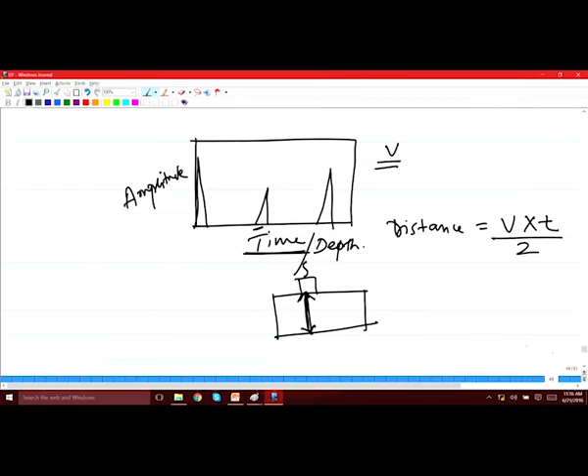In order to do that, you need to use a different type of block. This block is quite versatile, in the sense it can not only do calibration for the angle, but it can also calibrate normal probes as well, and there are a few more things you can do using this particular block, as we are going to discuss today.

This block is known as the IIW block. IIW stands for International Institute of Welding. So this block is specified by this institute.

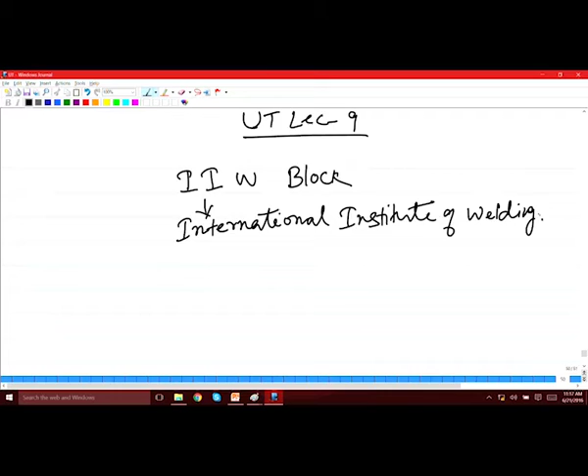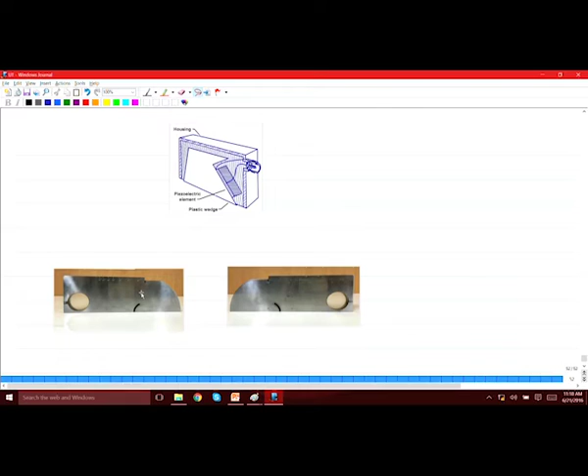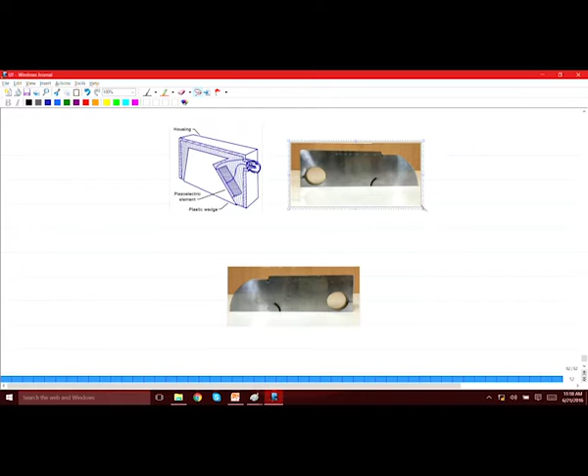If you see the block, it looks something like this. Let us say you have this kind of angle probe, which you have seen before, and you need to calibrate it for the angle and a few more things, as we are going to see. For that, this is the IIW block which is used. Let me magnify it a bit so that you can see it clearly. So this is how it looks like.

It is a block made of steel, and there are a few features on this block, and with the help of these features we can calibrate an ultrasonic transducer and the instrument.

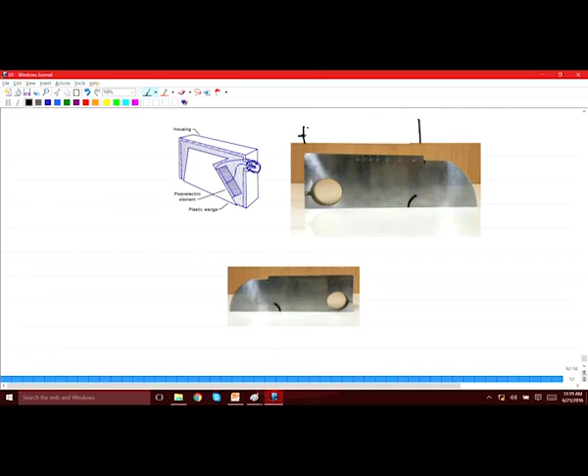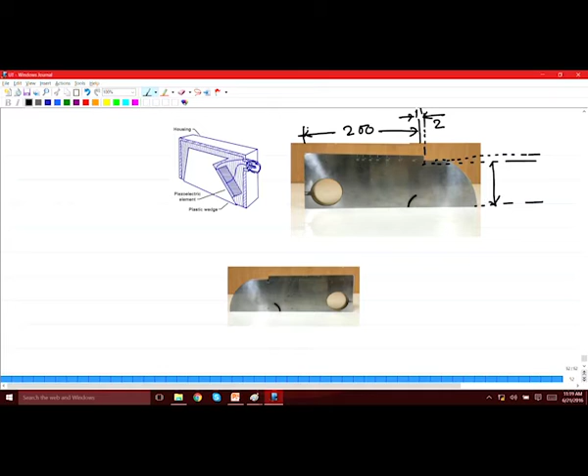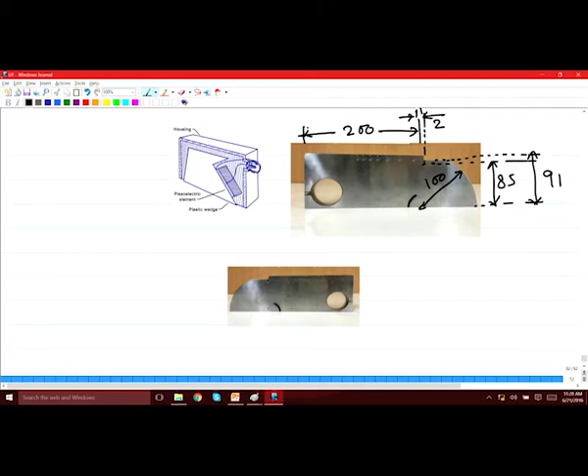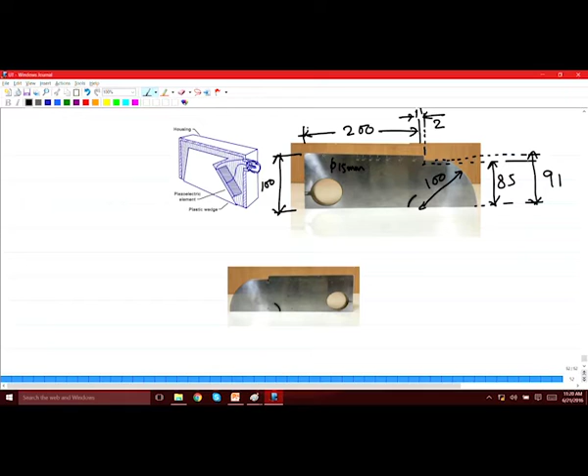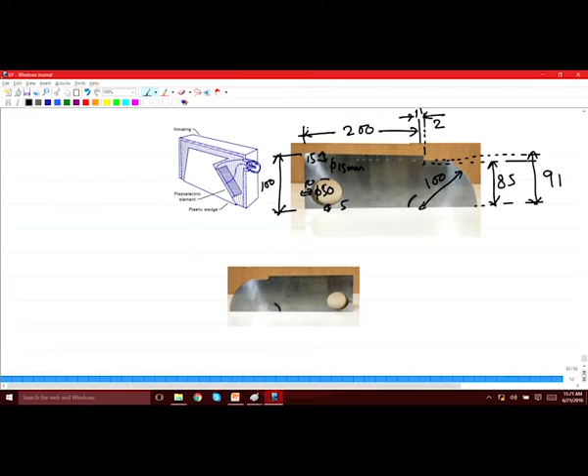There is a hole over here at this location. It is a small hole, the diameter of which is 1.5 millimeter, and it is at a distance of 15 mm from the top. And you have a bigger hole over here, which is 50 mm in diameter; from this end it is 5 mm and from the other side it is 10 mm. The total length of this whole thing is around 300 mm.

So these are the typical dimensions of this particular block, and now you can see there are several features on this. The first one is a curvature over here, this 100 mm radius curvature. Then, as I said, there are two holes: one over here which is 1.5 millimeter, and then a bigger one, a through hole, which is 50 mm in diameter.

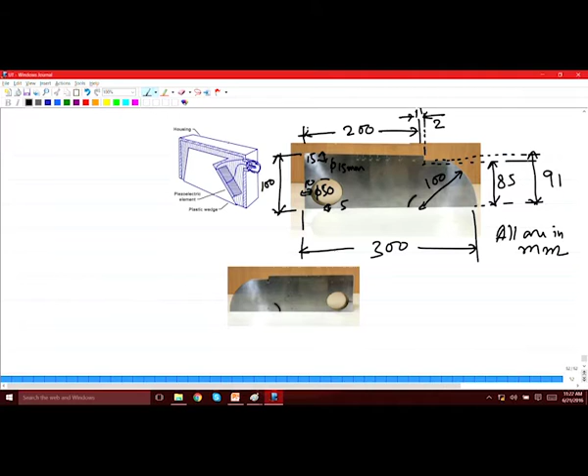Let us see how this can be used to calibrate angle probes. This is an angle probe shown over here, which you have seen before also, and you've seen this plastic wedge has been cut over here to provide that particular angle that you need.

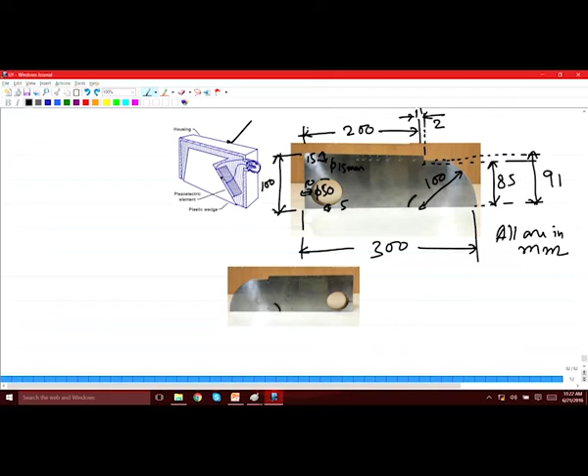The first thing that you need to know for this kind of angle probe is from this surface, exactly where the beam is exiting. So which exactly is the beam exit point? Because the angle has to be calculated with respect to that particular point. There is a surface here and you do not really know exactly what the exit point is, so the first thing you need to do is find out that exit point.

Only then can you talk about the angle, because the angle is measured with respect to the index point. So the beam exit point is also known as the index point, and that is the first thing you need to find out.

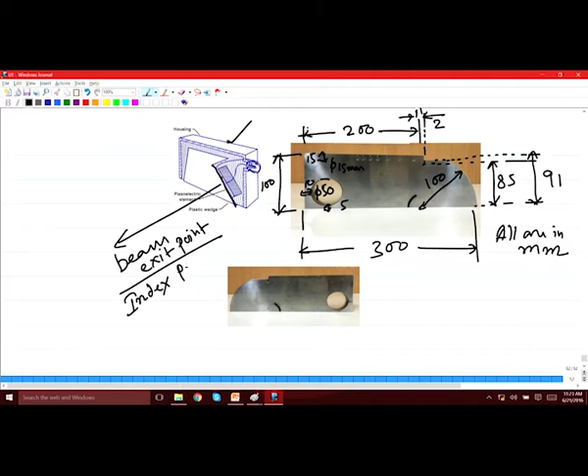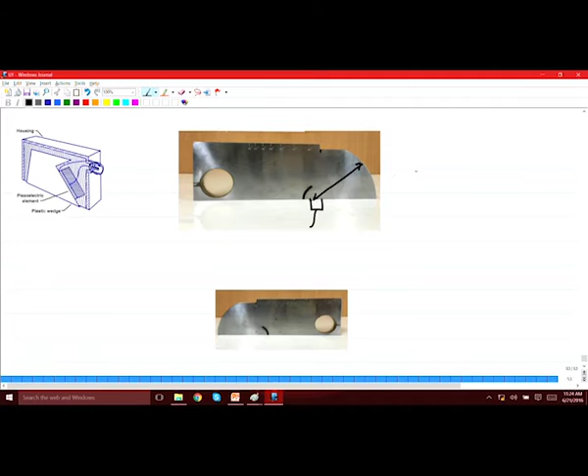Okay, so in order to find the index point, you have to keep the probe on this surface somewhere here, and hit this curvature and get an echo from there. So this echo from this curvature will be maximum when the probe is exactly on the center of this curvature.

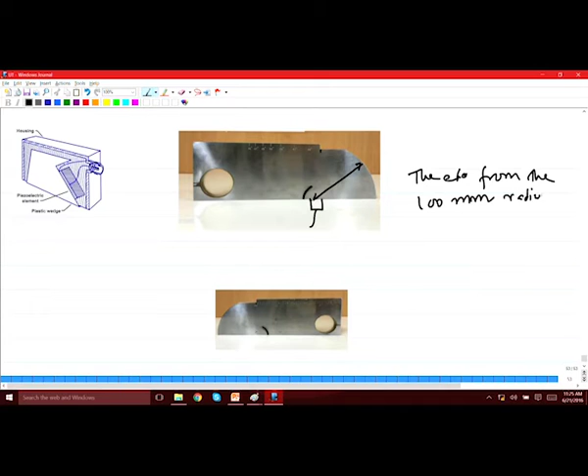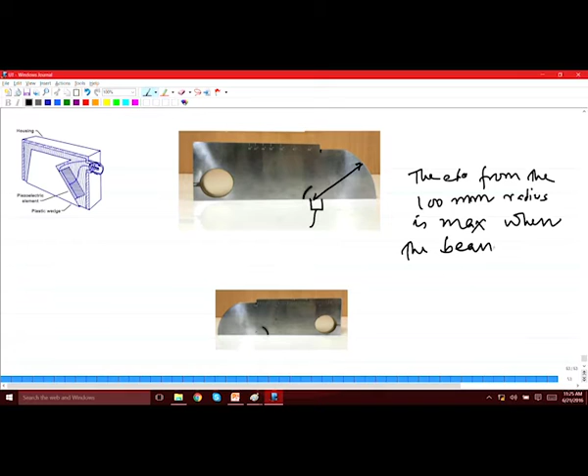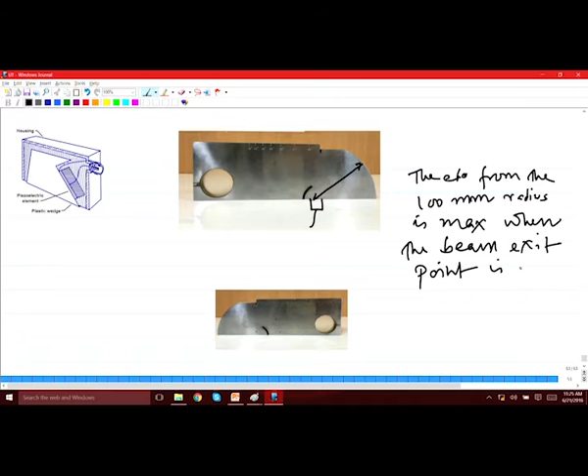So when the beam exit point is at the center of this curvature, you get a maximum signal. So what do you do? You take this probe and then move it on either side like this till you get a maximum signal. So the moment you get the maximum signal, you stop there and mark that point.

So there could be a marking on the block also, which is the center of this 100 mm radius. So that you mark on the probe as the index point or the beam exit point, right. So in some of the probes you can already see that this index point is being marked right on the probe. If that is there, that will be your index point, and you can match it by this particular method. And if it is not there, then you should mark it like how I said, getting a maximum signal from the 100 radius, and then at that particular point you mark the index point on the transducer probe.

So that is the first thing you do, and then you go on to calibrate the angle and other things. So let us see how you calibrate the angle using this particular probe.

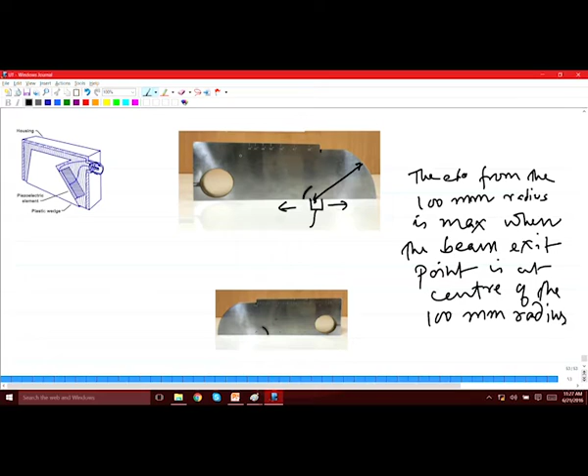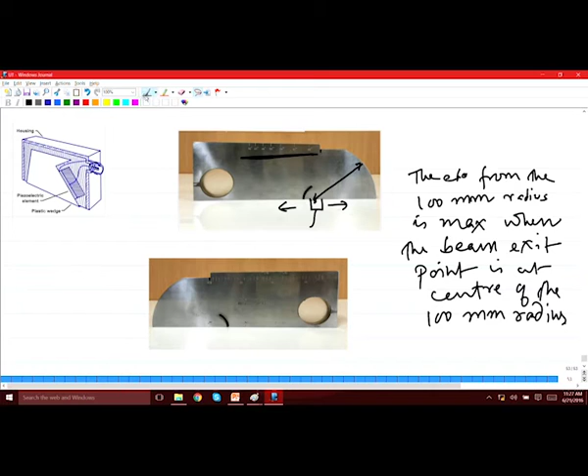So in order to calibrate the angle, if you look here on this part, there is a scale graduated on this, on the block. That is the scale for the angles. We can see there are several angles which are marked there, like 45 degree and 60 degree and so on. Similarly, on the other side also, on the bottom also you could see, here also along this area, there are some angles which are graduated, which are marked on this surface.

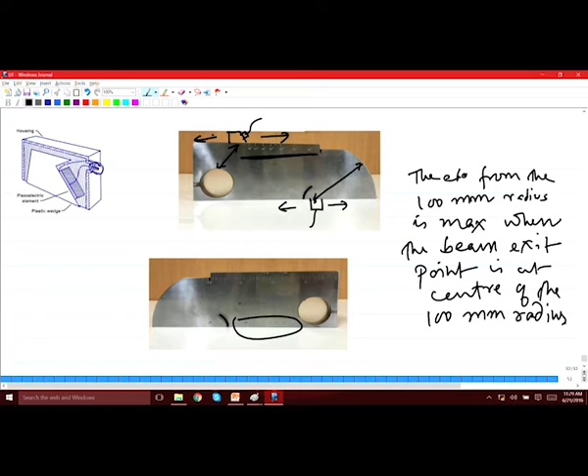So using these angle scales, you would be able to see what exactly is the angle of the ultrasonic beam which is coming out from an angle probe. So in order to do that, what you can do, you can keep the probe over here on this place, and then get an echo from this 50 diameter hole. So what you do, you move this probe on either side like this again, so let us find out the beam angle from this.

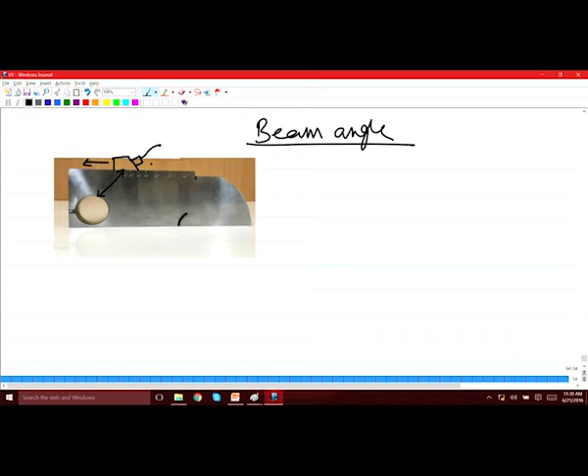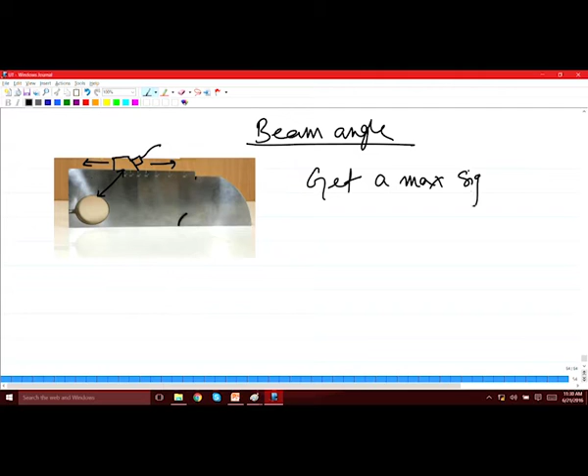So, as I said, you keep the probe on this surface, and get an echo from this 50 diameter hole. And what you do, you move the probe on either side like this and get a maximum signal from the 50 diameter hole.

So when you get the maximum signal, you stop it at that point and then see from this scale that the index point of this probe is matching with what angle. That will be the beam angle. So this is how you find out the beam angle first.

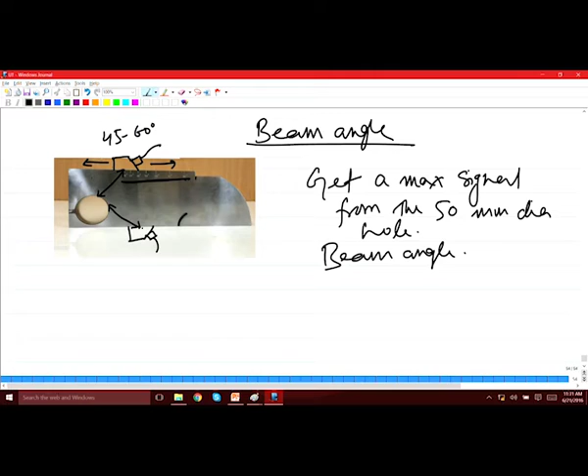So this top surface that you have, if you keep it over here, this can be used for angles in the range of 45 to 60 degree, and for higher angles you could keep the probe over here on this surface. So this will be 60 to 70 degree, because if you have seen the angles, the higher angles are on the lower side and on the top side this is the range. So this is how you first get to know the angle.

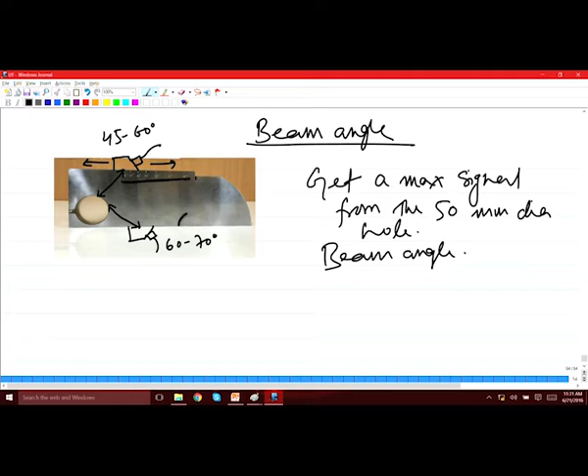Once you have established the index point, you get the beam angle. But a beam angle will also have a spread, beam spread. So this spread also you need to find out as to how much is the spread in the angle. So what you do, once you establish this angle and the corresponding point for the maximum signal, you move this probe again on both the sides from that point of maximum signal.

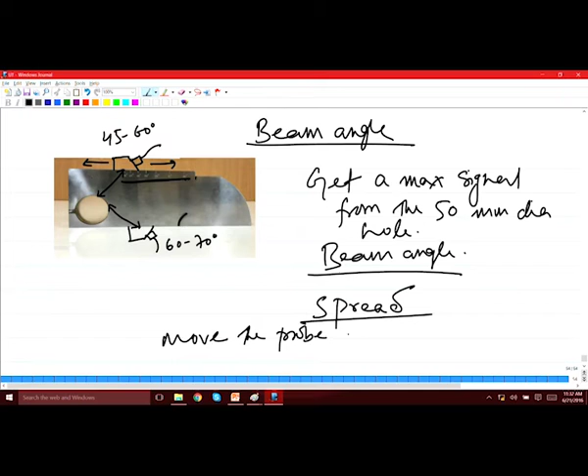So first you move, for example, towards the left till the signal becomes 0. So move it on either side till the echo becomes 0. So first you move it on the left hand side and then see at what point it is becoming 0. Note down the angle when it is 0, and the difference of these two angles on either side will give you the beam spread.

First move to the left and see at what point the signal becomes zero, note down that angle, then go to the other side till it again becomes zero. Note that angle also, take the difference of these two angles, and that will give you the beam spread. So, this is how you find the beam angle and the beam spread using this IIW block.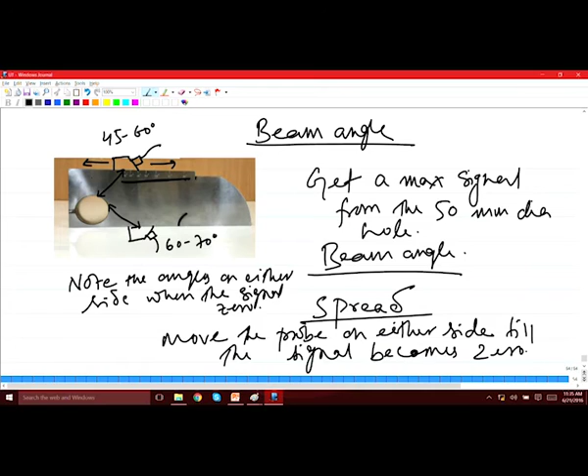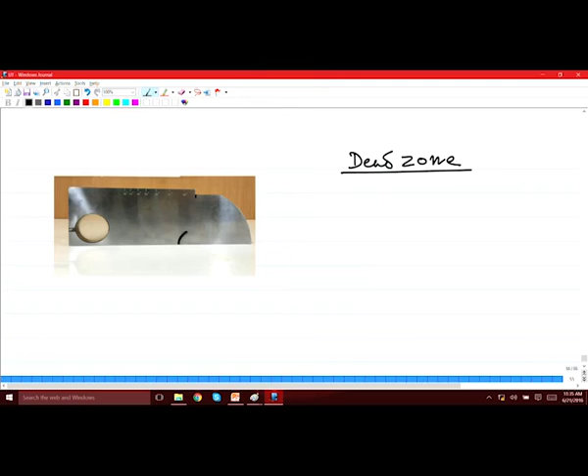There are a few other things, as I mentioned in the beginning, that you can do using this block apart from finding the beam angle. Let us see what other useful things we can do with this particular block. One very important aspect, as we have discussed before, particularly for closed surface analysis by ultrasonic testing, is the dead zone. You should have some idea about the dead zone for a particular transducer used for closed surface analysis.

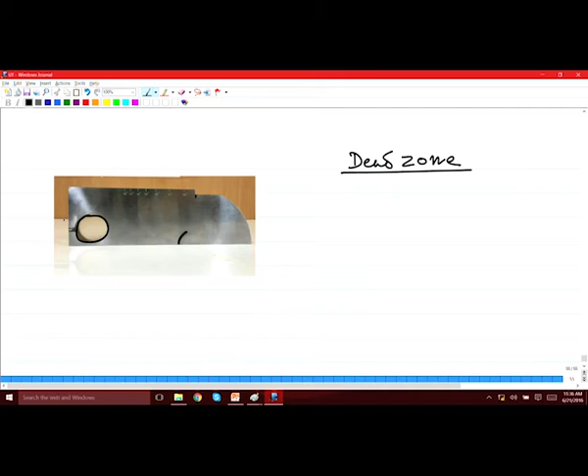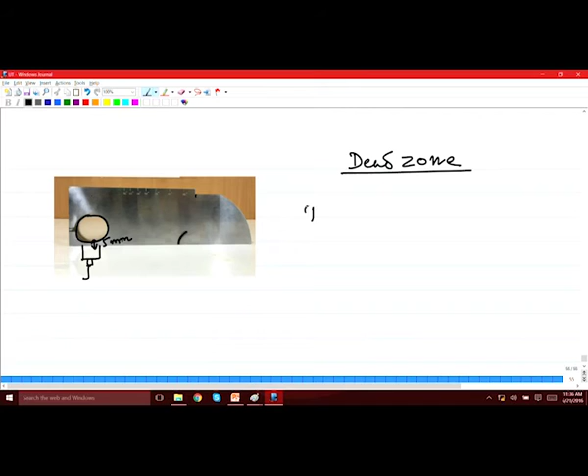That can also be found from this block, using this 50 mm diameter hole. What you do is keep the probe at this point first, and you know this particular distance is 5 mm. From this location, if you get a clear signal from the 50 mm diameter hole, then it will indicate that the dead zone is within 5 mm or less.

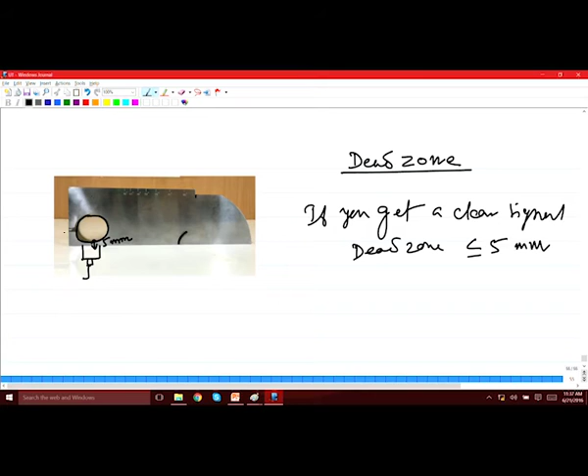Because you are getting a signal from a 5 mm distance using that probe, it indicates the dead zone is less than 5 mm. If you do not get a clear signal from this side, then you put the probe at another point where the distance is 10 mm. If you get a signal from the 10 mm distance, but not from 5 mm, that indicates the dead zone is between 5 mm and 10 mm. On the other hand, if you do not get any signal from the 10 mm distance either, then it indicates the dead zone is more than 10 mm. This is how you can get an idea about the dead zone from this IIW block.

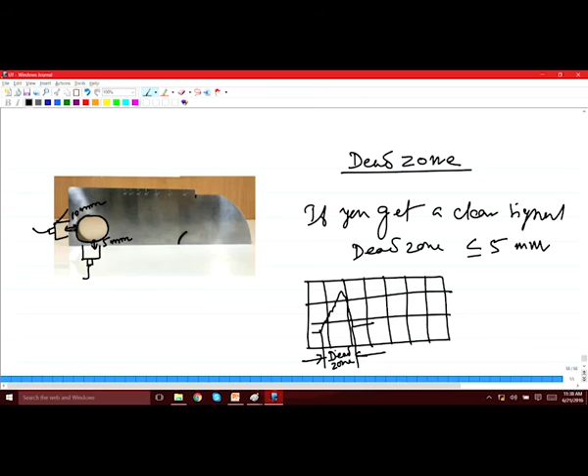I should also tell you that some idea about the dead zone can be obtained from the display as well, from the initial pulse that you have. Let's say the initial pulse might look like this. The width of this initial pulse will give you an idea of the extent of the dead zone for that particular probe, using which you have obtained this initial pulse.

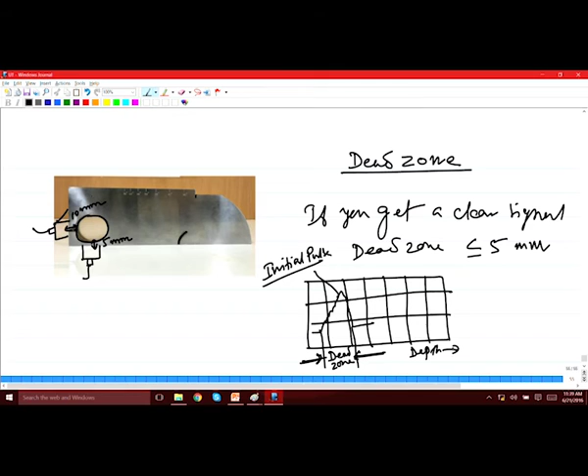Because within this particular distance you do not see anything apart from the initial pulse, you do not see any other echo. That means within this distance the probe is not able to receive any echo at all, and that is why the width of this initial pulse indicates the size of the dead zone for that particular probe.

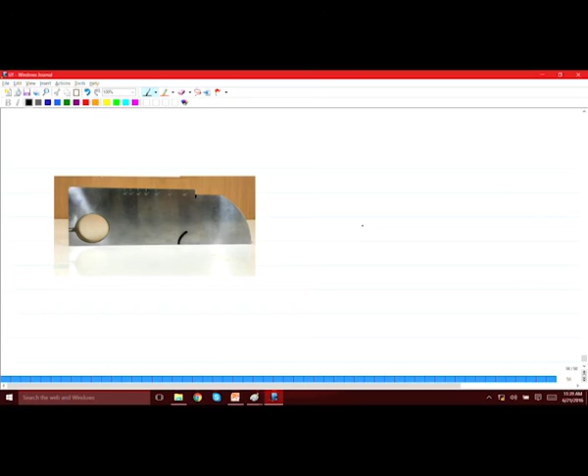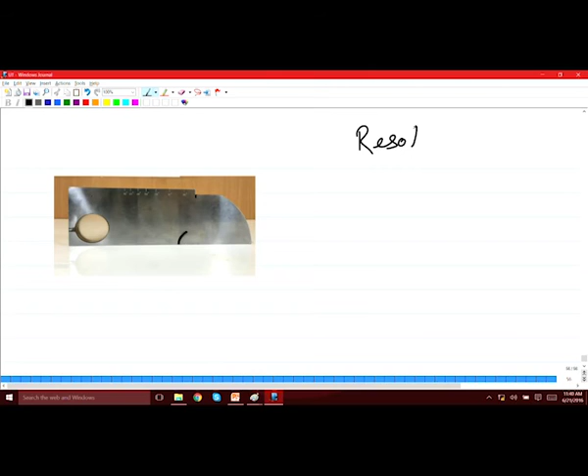We will see one more important thing which can be found using this IIW block, which is the resolution of an ultrasonic probe. Resolution means if you have two closely spaced defects lying very close to each other, you should be able to get two different echoes from these defects instead of getting a single peak or two peaks merged together. If you get two separate echoes from two closely spaced defects, then the resolution of that probe is good.

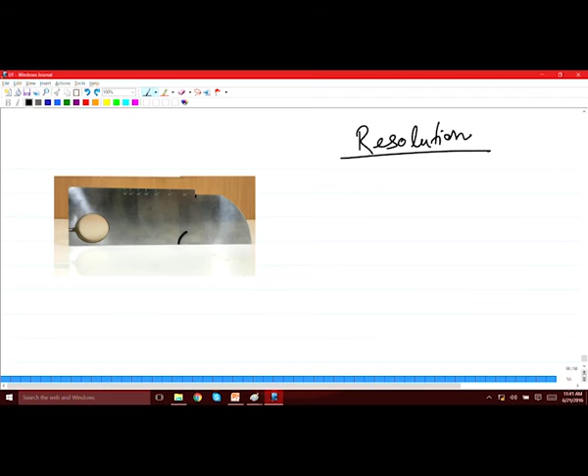On the other hand, if you do not get two separate echoes from these two defects, then the resolution is not good. With the help of this particular notch that you have, you would be able to find out whether the resolution for that particular probe is good or not. This is a 2 mm wide notch.

So what you do is place the probe on this surface and get echoes from this notch from three different points: first you get an echo from here, then right from the root of the notch like this, and then again from the other side of the notch.

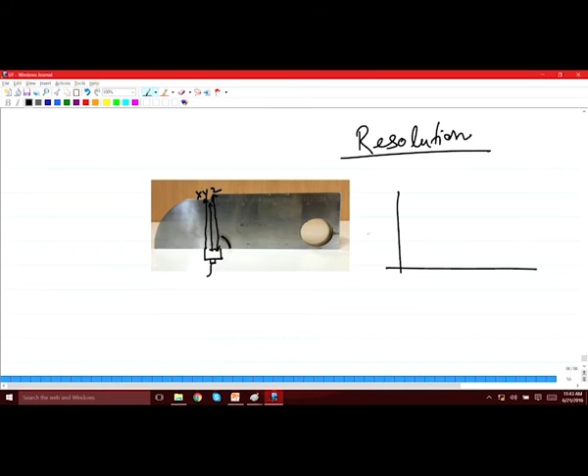So let us call these points as x, y and z. You can see these points are very closely lying to each other within 2 mm. If the resolution of the probe is good, then you should be able to see three different echoes with respect to these 3 points, like this: y, x and z. And if the resolution is not good, then you will not get 3 different echoes from these 3 different points.

So this IIW block is also useful for finding other important parameters like the resolution, and also you would be able to get some idea about the sensitivity and things like that.

So this was about calibrating angle probes using this IIW block. Since we have been talking about calibration in the last few classes, it will be good to summarize this particular process of calibration. So let us do that.

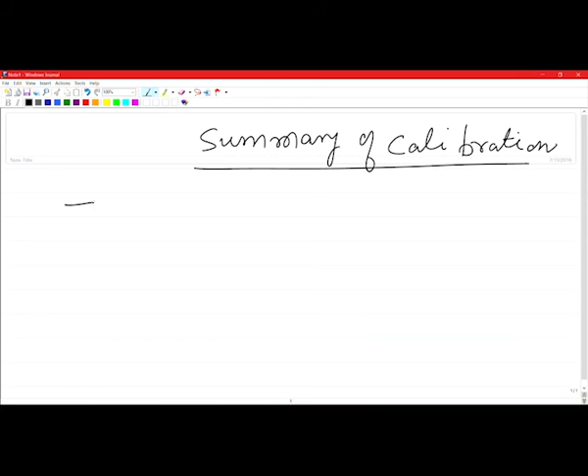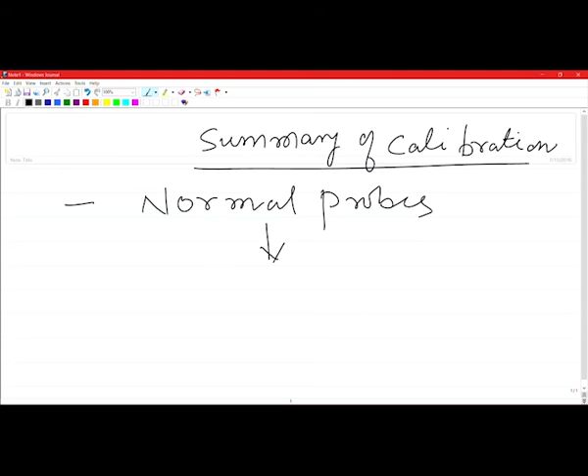Before we close today, in case of normal probes, we saw that you can calibrate the distance and the area.

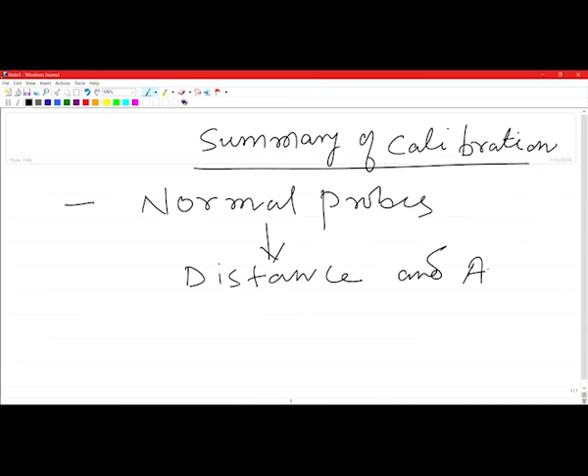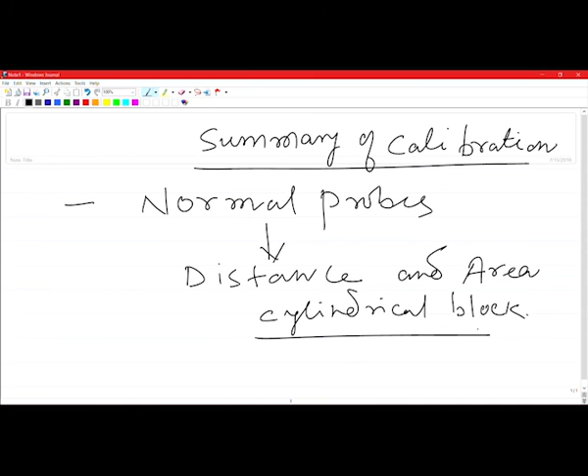In this case a cylindrical block was used, and this block had a flat bottom hole at the bottom of the cylinder and a particular metal distance. So in case of distance calibration, the metal distance was varied, and in case of area calibration, the area of the hole was varied. That is how you get different distances in one case when you vary the metal distance to calibrate the distance, and in the case of area calibration you vary the size or the area of the hole, and that is how you get different areas to calibrate in terms of area.

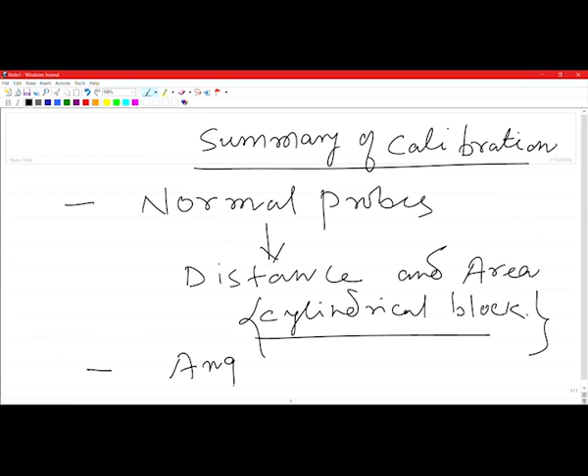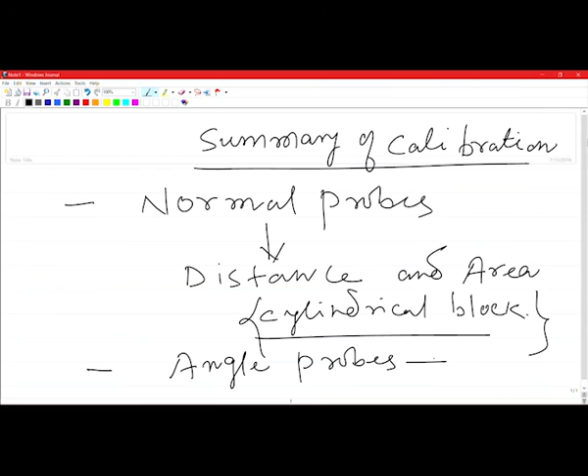So that was about calibrating normal probes, and when you have angle probes, there we saw that you could use a block known as the IIW block, and in this block we have several types of features which can be used to calibrate the angle for a particular angular transducer. On the block we also had this angle scale graduated, and with the help of that we could calibrate the angle.

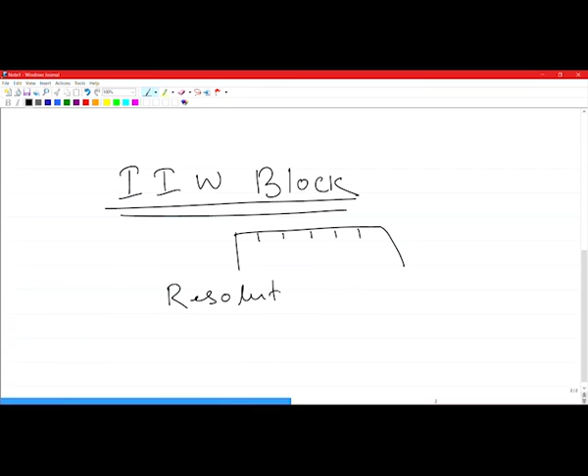And apart from this, we also saw that this IIW block is quite versatile, in the sense that apart from calibrating the instrument or the probe for the angle, it can also do certain other things. For example, it is very useful for getting an idea about the resolution of a particular probe. That also can be done using this particular block, and then we also saw that you can also get an idea about the dead zone by using the 50 mm diameter hole that you had in this block.

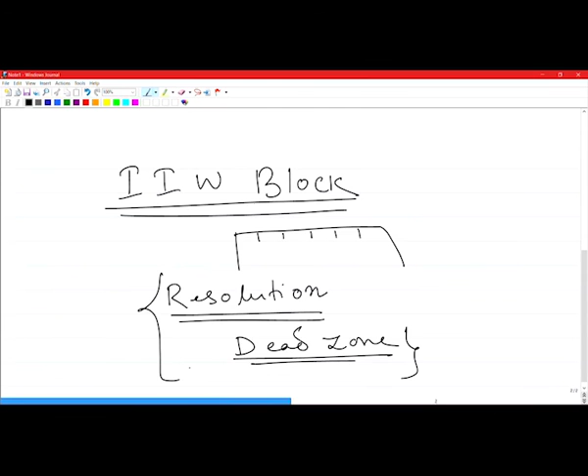So this is another thing that can be determined from the IIW block, and that is why, as I said, this is a very versatile reference block which can be used not only for calibrating the distance or the angle, but also for getting important parameters like the resolution, dead zone, and in fact you would also get some idea about sensitivity. So these are the different things that can be done with the help of the IIW block.

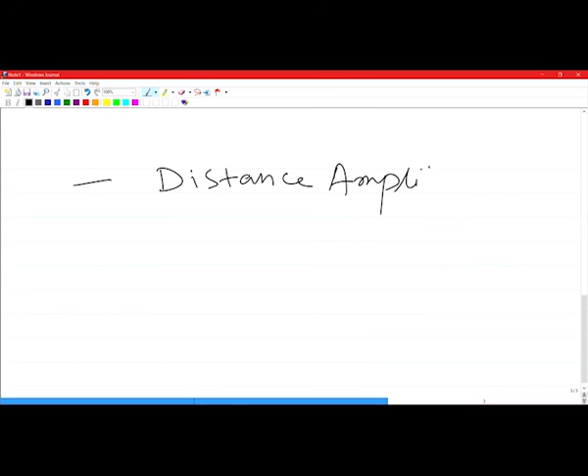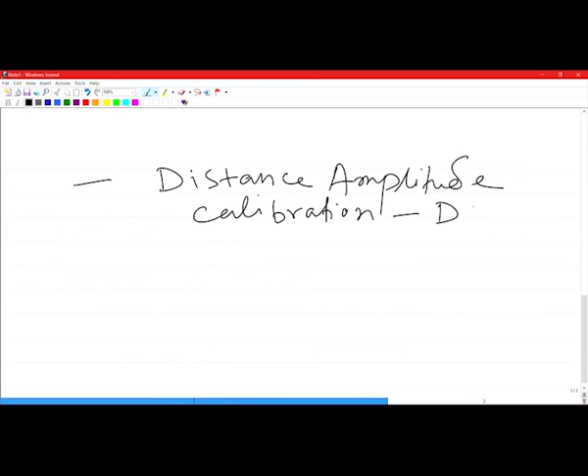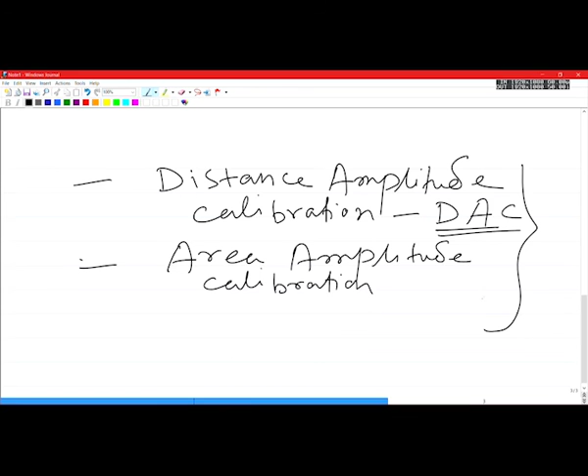So finally, what we have for calibration: we did distance amplitude calibration, also known as distance amplitude correction or DAC. We did area amplitude calibration, this too with the help of cylindrical reference blocks.

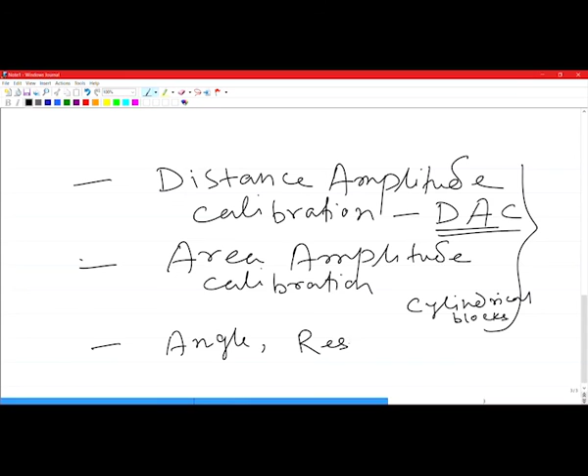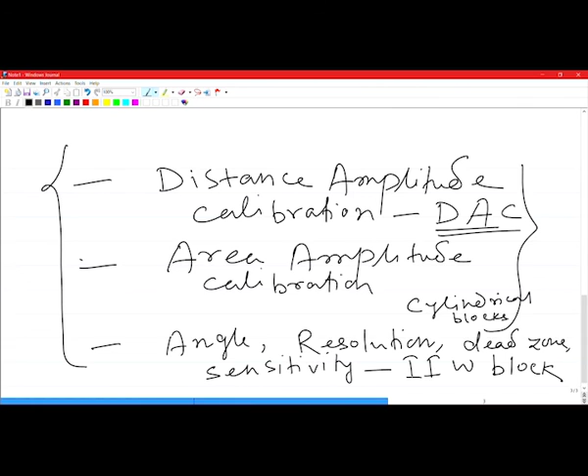And for calibrating the angle and getting to know about resolution, dead zone, and sensitivity, this IIW block can be used. So this is how the whole process of calibration is done, in order to ensure that before you do the test, the instrument and the probe are calibrated and you do not end up with any erroneous results.